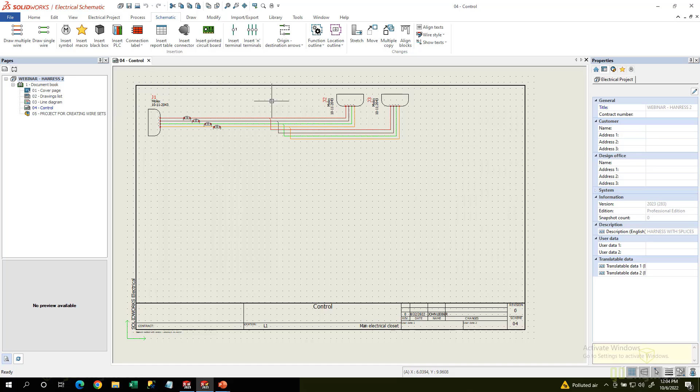Connectors have wires going to them, and then I've got some splices in here. So I have splice 1, 2, 3, and 4, and they're going out again to the connector. Kind of what I'm doing is I'm just taking wire number 1, splitting it off, so I actually have 2 wires behind the splice.

So 1 wire is going to go down to 1 connector on pin 1 on the other one, and connector 1 on the other, like J2, just repeating that same scheme throughout. So of course, once you're done, you group them all, add them to a harness, and then we'll go right over to the 3D side.

The cool thing is, if I have SOLIDWORKS going and I have the add-in turned on, I can open up the assembly straight from here. And when I do that, it will open up the project. You can see I've got the project loaded. The control is actually open on the 2D side, but I can see the schematic if I want on the 3D side as well for my viewer.

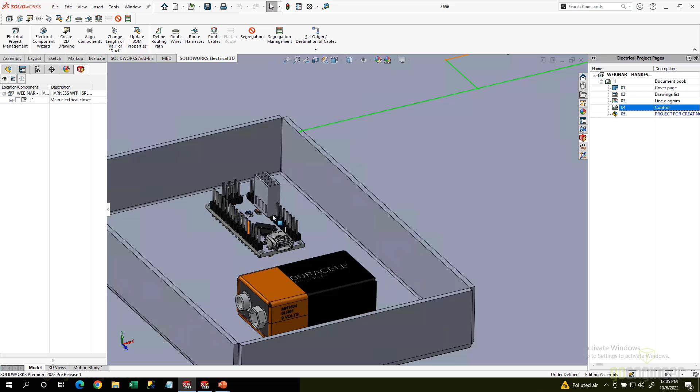And you can see I've got an assembly, I've got some parts, I've got my cool little Arduino Nano here with a little component on there for the connector, got a little 9-volt battery.

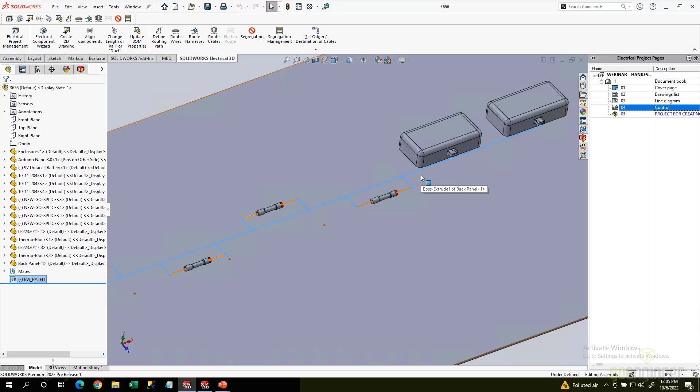And then if you've seen some of the previous webinars, I have an EW path, so it's a 3D sketch path that's going out here. Pretty much, this is where I want the harness — if you're doing wires or cables, it's where any of those things are going to route from and to. So that's kind of my little cheating road. You think about Google Maps, and Google Maps only routes you on the road, hopefully, and that's kind of what we're doing, kind of giving it the road that we want to go down.

So pretty simply, everything's from the 2D is kind of brought forth to the 3D, so all I have to do is say route harness, and I'm going to say use splines. I like splines. And then let's take a look at some things, because the whole purpose of this is that I'm going to do a whole bunch of things wrong.

I also want to reiterate, I'm running in SOLIDWORKS 2023, so I'm working on the pre-release of that, and it's been actually very stable. I've been quite pleased with this. All right, so let's take a look at this route harness.

Before I do this, sometimes when I'm doing troubleshooting, I'll hit the Draw Graph button. And what that does, if you think about Google Maps, it's got to find hundreds of different ways to go from A to B. So that's kind of what this is doing, it's finding all the different path routes that it can go from A to B.

But in this case, I have two settings over here. One is the distance between the routing paths, and one is between the beginning part and the next routing path, so the initial start point and the next one.

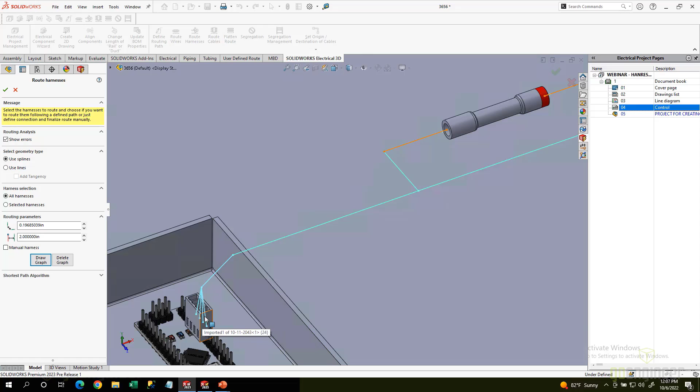So if I make this a 2 and say draw graph, notice that now it actually connected these two up. So now I have a roadway, it can find the connection paths between this from connection to where it needs to go. Then we can come down here and notice that it did this one, but it did not do this one. So I know I need to go a little bit further.

So I have two options. I could go back to the EW path and make it a little bit closer to this. It really depends on how much control you actually want over the paths. So if I make this 2.5, and we draw the graph, now it's close enough to that, and it makes the connection, and we're good to go.

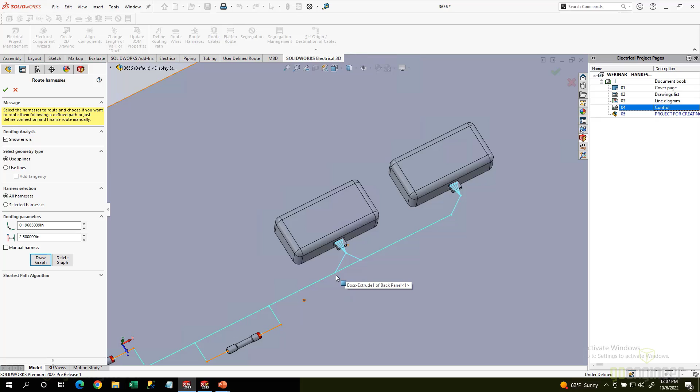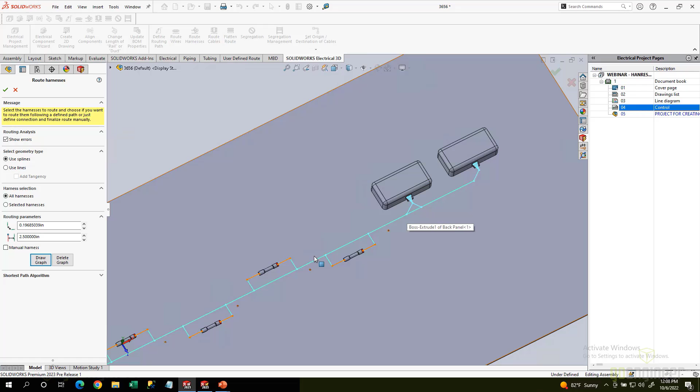Same thing, when we're doing the graph, it doesn't know whether the wires are going to go one direction or the other. So sometimes you'll see multiple locations, and depending on which algorithms you use, notice we have 3 different algorithms to choose from. When we hit the OK checkbox, sometimes it'll pick one path versus another. But for the most part, it's trying to pick the least possible path between the two connections you're trying to create. Then now I've got them, everything looks good, it has paths to go through.

I can delete the graph so I don't have to see it, and then I'm just going to hit OK. I'm going to keep the show errors on, just because that's what this webinar is about, is showing all the issues. So we'll give it a couple seconds, like 7 seconds, so that's pretty good. And let me go ahead and turn my sketches off.

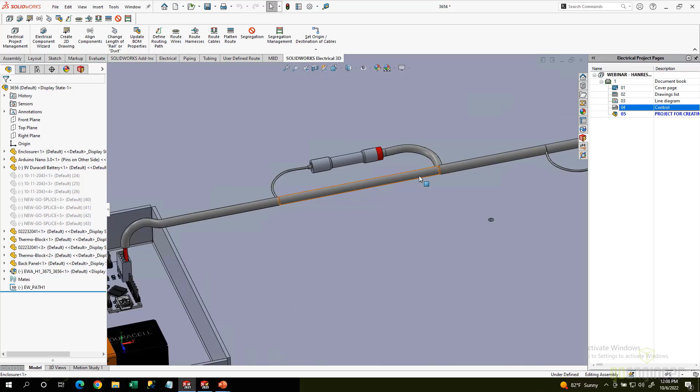There we go. So we can kind of see that I've got my 4 wires coming out of the connector, going into my, there's a CW cable point. So they all go to the cable point, and then the cable point goes up and around, starts going through the EW path. And it looks like everything's going pretty good.

I've got a skinny wire. It's spliced and is going to 2 wires. So I got skinny to fat. That's looking good. Again, skinny to fat, looking all right. Fat to skinny, that's not looking good. Even though I'd like to be more fat to skinny.

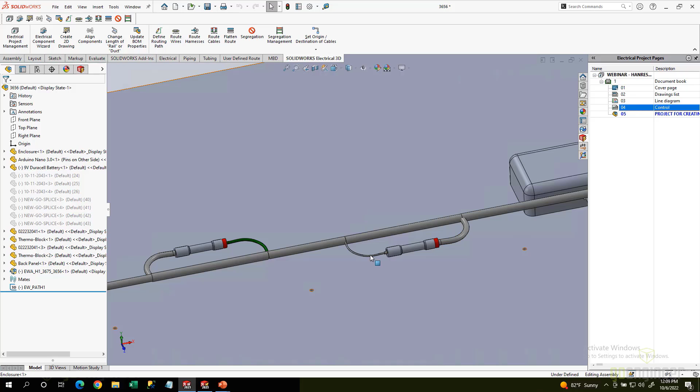But then here we got skinny to fat. So this is kind of what we're looking at, I've got 1 wire in here and 2 wires in there. And so the other connections all the way to the end connectors look pretty good. So I'm happy with that. And the splines look pretty nice between those two.

So a couple things we need to look at. One of the first things is, if I open up just this splice, some things I want to point out. One is it's got 2 C points, 2 connection points, so the direction it's going and how far out it's going to go. And then we also have a route point, and notice the route point is at the very center of the part.

And there's another little sneaky thing, you also need, if you run this through the routing library manager or the electrical component manager, it will add this component type equals a splice. So that's something you may need to make sure you have set up. Also type cat part may actually be added as well. So some of these are little things that you need in the catalog and in the part to make sure it works the right time.

The other thing that I did is I put a little red marker on here. So even though you may buy it and it doesn't have the red marker, I like to put some kind of a marking on there so I know which direction is my 1. So I'm going to say this is going to be 1 coming in and 2 going out.

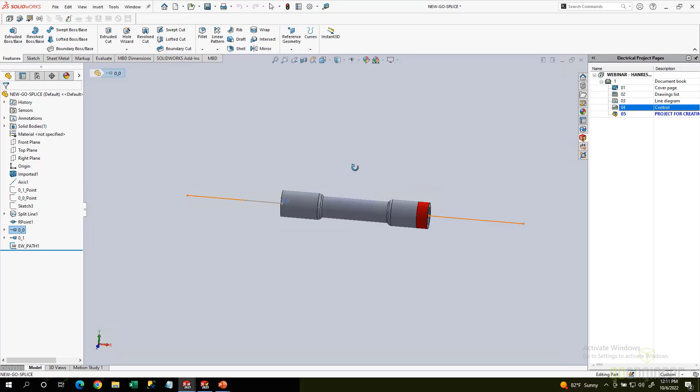And so that way I know the direction of the orientation of these things. Okay, all right, so we'll close out of this.

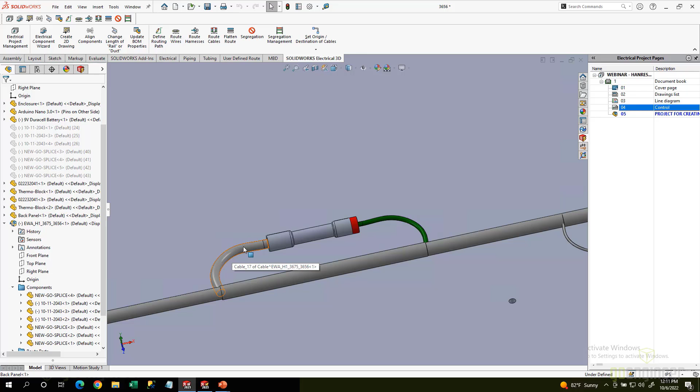And you can kind of see this one actually did right. I got one green wire, and then there's two wires in here, so the color is going to be neutral. It's not going to show green and orange, or two greens, because the wires may be a little bit off there.

So one thing we need to do is take a look at what's on the 2D to make sure this thing works right on the 3D. That's kind of the whole thing, is make sure your 2D's right. All right, so notice that on the splices, I got splice 1, 2, 3, and 4.

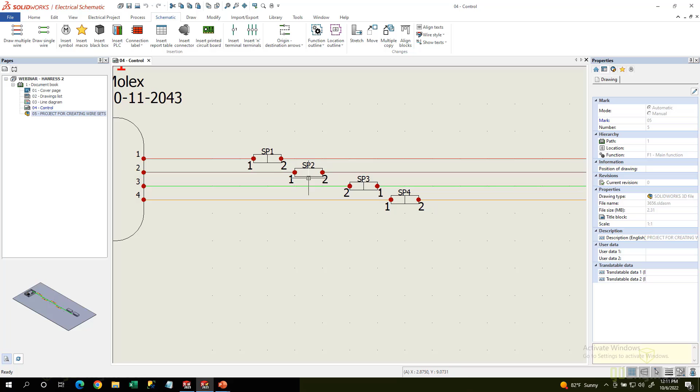Now, I got this from somebody else, and sometimes you may actually get other things from other people. So you got to be careful as far as how they manipulated this and how the symbols are created. Now, I can do something sneaky, and that's kind of what I did, is I went ahead and reoriented these two. And I can right-click and do this orientation and do invert.

But there's going to be an issue with doing this, okay? And I did it with all 4 of them. I'm doing this on purpose because sometimes you guys may run into this. And if you do, you'll now know why, okay?

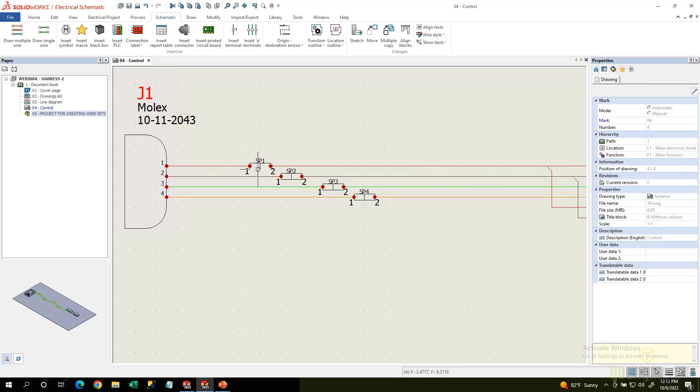So it looks good in 2D. It seems like, oh yeah, I've got 1 over here and 2 over here. But the invert is really just supposed to be used for terminals, not really for splices. So if I wanted to do it correctly, I should actually have a separate splice that has 1 and 2 on the proper ways. So main thing, try not to use this invert button when you're doing splices.

Okay, so let's see what it does. Let's just delete that. It's all gone. That's okay. We're going to route harnesses. We're going to route it. Wait 7 seconds.

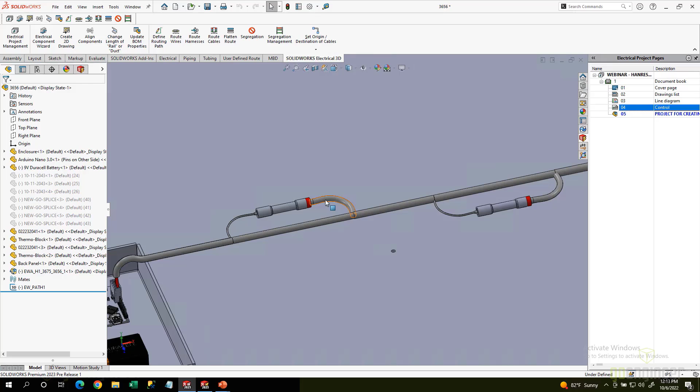There we go. And notice I've got, skinny to fat, or small to large, whatever you want to call it. And notice that on my 3rd one now, it's looking good. I got small to large, and then small to large. So everything looks like it's doing pretty good. Looks like it's happy. Everything's fine.

But there's a couple things. I know that I've got an issue here because it's gray. So something weird is going on. And also, if I zoom in there, notice that I've got this little, I'm not sure what that is, but it's there, and that's not supposed to be there. So something weird is kind of going on in here. And so sometimes we got to dig down a little bit and figure out what more is going on.

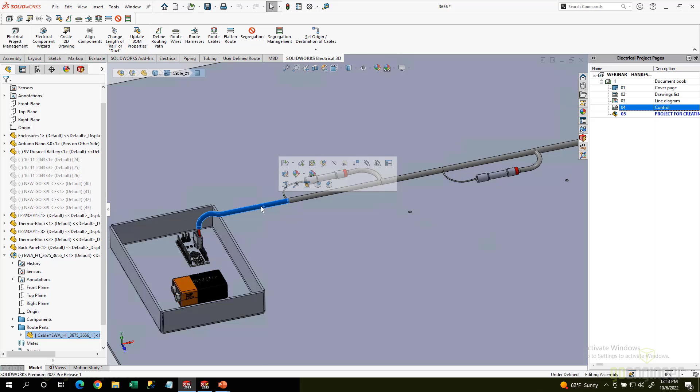So SOLIDWORKS gives us the tools to do that. So I'm going to edit the route. Just right-click any part of that, edit route. And there's a couple things we can do. I know that there's 4 wires going through here.

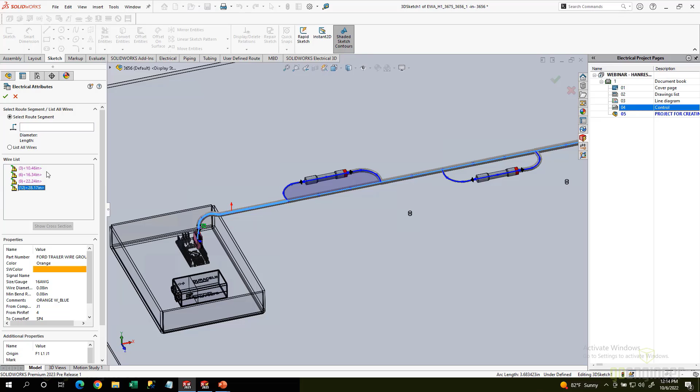We can check this by right-click and just go to Electrical Attributes. Then now it lists the 4 different wires that are in here. And notice that I got little exclamation points on here. So the exclamation points mean something's wrong. It may be kind of okay, but we need to probably double check it.

Okay, and if we go way down here at the end, before it goes off to these 2, these guys have a bunch of wires in there. So if I right-click Electrical Attributes, notice that I've got all the wires in here. And look, all these guys are good.

And I can click on them and I can see where their locations are going from and where they're going to. So this guy is going from this guy all the way up to the front. Wire number 2 here is going from this guy all the way to the front. So those 2 are looking good. In fact, all these other ones are really looking good.

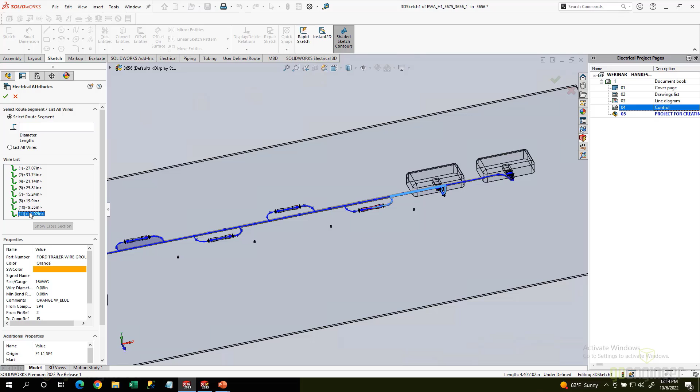Okay, another way to view these are to just do the Edit Wires button. So if you go to the Electrical tab, say Edit Wires, then you'll see this is going to be a list of all of the wires, okay, including some of my bad ones here. So notice I can, again, select on them and I can see where they're going from, where they're going to.

And go all the way down here. And then when we get down to the very end, where this connection is, you can kind of see what's going to go on. Let me zoom in just a little bit better. There we go.

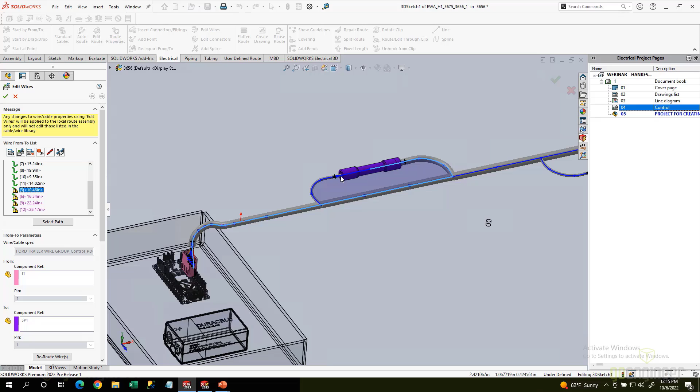This thing is actually going around to the wrong end of the C point, the connection point on there. Okay, I got the orientation of the 3D model correct, but C point number 2 is actually looping back around, and that's probably why I'm getting that little edge there. And if I click on this one, he's kind of doing the same thing, going around to the back side. This guy's going around the back side, and the other one's going around the back side too. Again, this could be fixed if I fixed it in the 2D and used the right orientation.

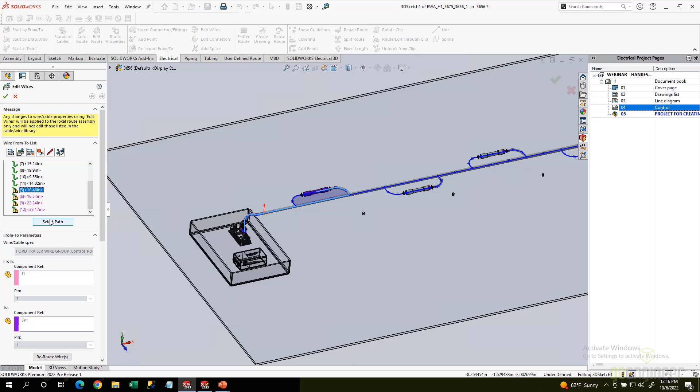Main thing is don't use the orient to flip it. Now, if I decide I'm just going to leave the 2D alone and not mess with it, I can fix it in the 3D instead. So I select it, hit select path, and you'll see each of these individual line segments are the different segments this thing needs to go through. For the most part, I don't need the last two, so I could delete them straight out here. Just hit delete, get rid of them. And I need to make sure it goes through this line, through that C point. I say OK, and notice that the error message kind of goes away there.

So again, I can do this pretty quick. I can also, instead of selecting them out there if I don't know which ones they are, unpick and then pick - I'm really unpicking just by selecting it again. Same kind of thing, just pick it and it goes away. So if I pick it once, it adds it; if I pick it again, it goes away. So that looks good, and we'll do one more.

So now all my wires look fairly decent. Okay, and we can dig a little bit deeper. If you scroll down here to the bottom, there's more options for the properties of the wires and some additional properties, and at the very bottom there's a More Properties button.

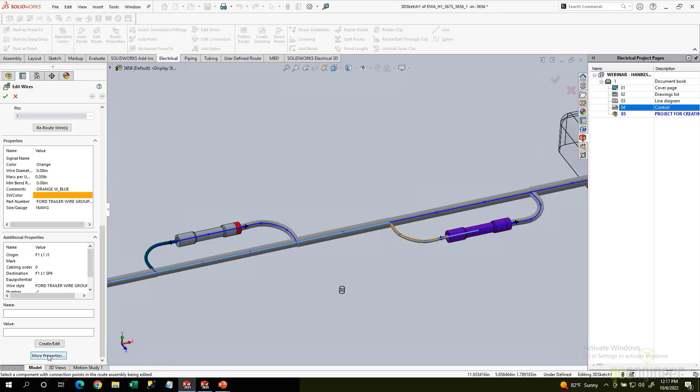This is actually what we pull in from 2D - this is your From To list. It gives me all your different wires, the lengths of the wire, the gauge of the wires. So there's occasions where you may have to come in here and look and make sure the OD of the wires, the gauge, and the bend radiuses are all coming in correctly, on the 3D side. So if it's not in 2D, then we don't have access to it on the 3D, so you've got to make sure it's good on the 2D side. This can be used as just a little check.

You can kind of see your little from and to. You could override if one of the pins is in the wrong spot - I can hit the little drop down, notice I've got 2 pins on that guy, this is on the splice. And I can also change the component if I need to. I don't want to do that though. Maybe on the connectors, you can kind of see I've got connectors and I've got my 4 pins on the connectors, so I do have options to change these. Please don't, because really all this information should be coming from the 2D.

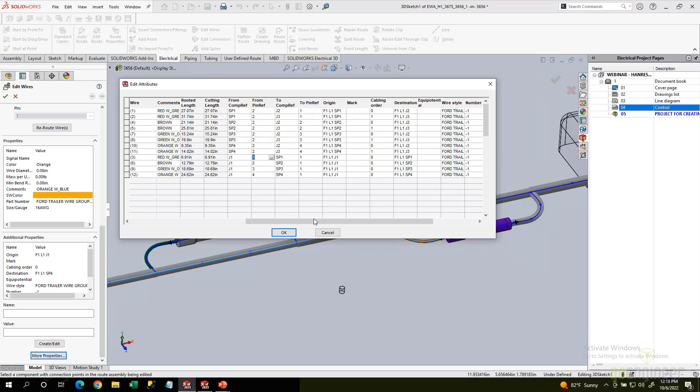You should adjust the 2D, and then once you import the harness, route the harness, this will update from the 2D side. But there have been some slight occasions where I've gone in and just needed to make an adjustment on one, and you can kind of get to this chart if you need to. For the most part, I just use it for troubleshooting, so it works out pretty good.

One thing you may want to do - occasionally some of these are like a twisted pair, coming out of here as actually 2 different wires. And it looks like I messed this one up, let me reselect that path. I think I hit undo on there. Let me hit OK out here just to make sure that it's good.

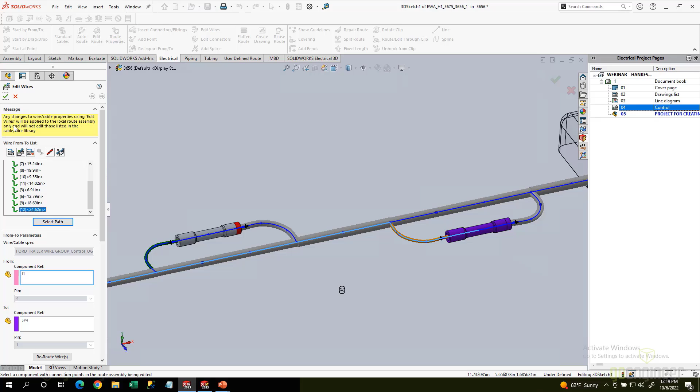All right, yeah, and see I get orange, I get green here, red, and then dark red, light red. But one other thing I wanted to show is that we do have twisted pairs. So if I select on 2 entities here, I can do a twisted pair, and then when I do the twisted pair, it'll tell me how many twists per, say for instance, inch, and it will automatically add that to the length of the wire. I'm not going to do it on this one, but I just want to show you that it is there and available.

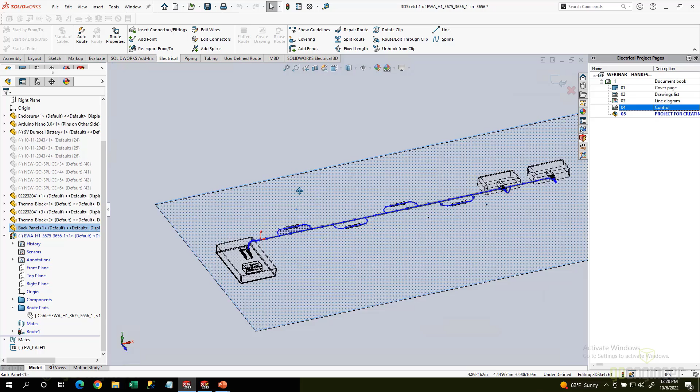And that's your edit wires. So that looks pretty good, I'm pretty happy with that. Everything's looking all right, got all my small wires to my big wires, so those are all nice and fixed. And then let's take a look at some others, let me get to the top level.

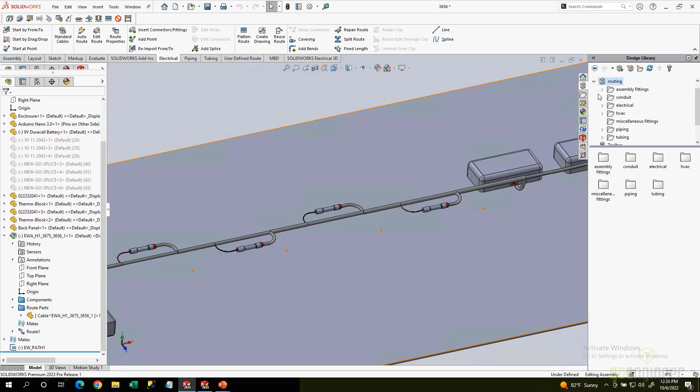In my electrical library, routing electrical, I have some little clips. I'm going to drag and drop a clip in, and I've got mate references, so it attaches to these little holes. Before I drop it, while still holding down my left mouse button, I can hold down Shift and use the arrow key, and you can see I can rotate it. I think it's like 15-degree segments or something like that.

So I'm going to drop it in there like that. It has multiple configurations, so I think my wire is about that size, so we'll say OK to that. This clip is at the top level of my assembly, so I just kind of want you to keep an eye on this and how it works.

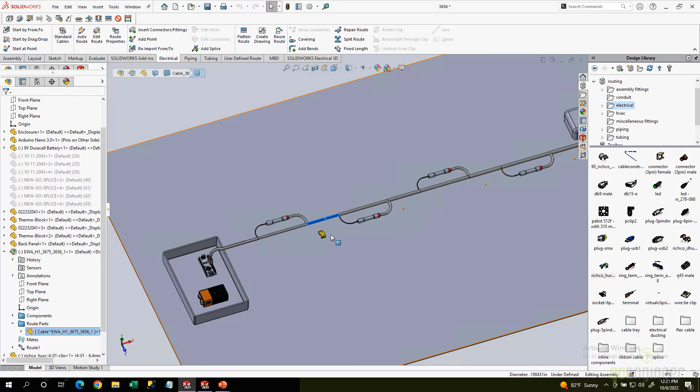All right, so then I think, okay, well, I want to route this thing, and it's way up off the ground there, so I want to route it through the clip. Pretty easy, just right click, edit the route. We've got a button that says route through clip.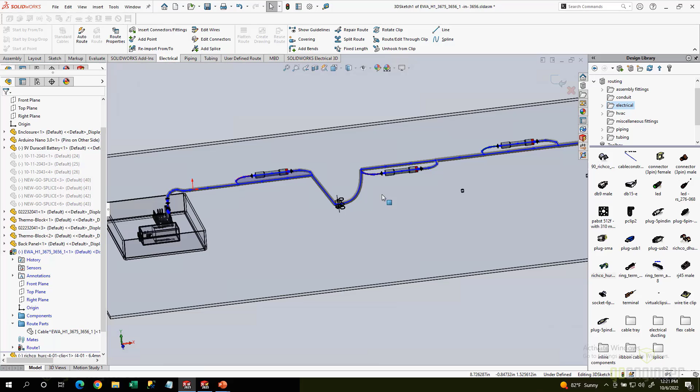So I pick on the clip axis there, and then I want to route this segment, and we'll say okay. And then I start looking at that, and I'm like, oh, that's not going to be good at all. You know, kind of expected the whole thing to go down, but the software is only going to do what you tell it to do.

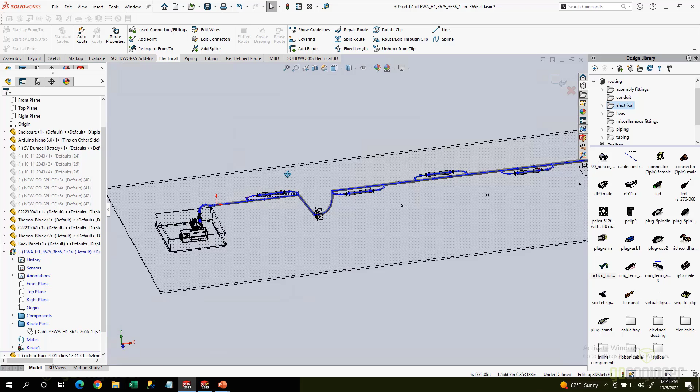So it said, oh, well, all this other stuff probably has constraints and things like that, so I'm doing that, I'm routing it through the clip. This is not maybe the best way to do it. We probably need to kind of look at our EW path first, and then go around and fix it. So I'm going to go ahead and close out of that.

Another thing that we can do in our editing of the sketch, the route, and I'll show this a little bit more later too, is that each individual segment we can show this sketcher triad, and then I can manually drag it around as needed. Each individual point can be adjusted, and you can also delete and add segments.

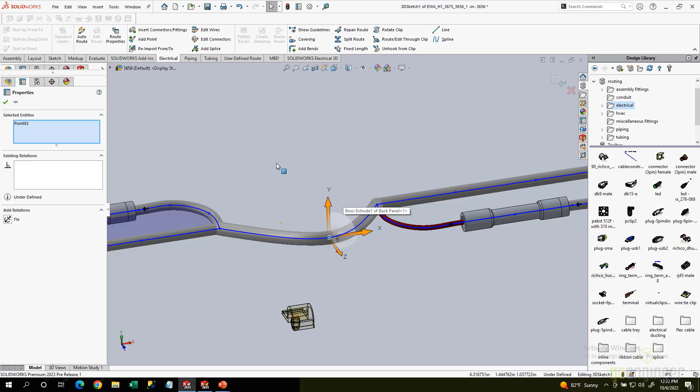But again, be careful, because if I do delete a line and then add a line, then I gotta go back and check my wires and make sure they're routing through the right direction. Okay, all right, so I'm going to close out of that, and I'm going to fix this.

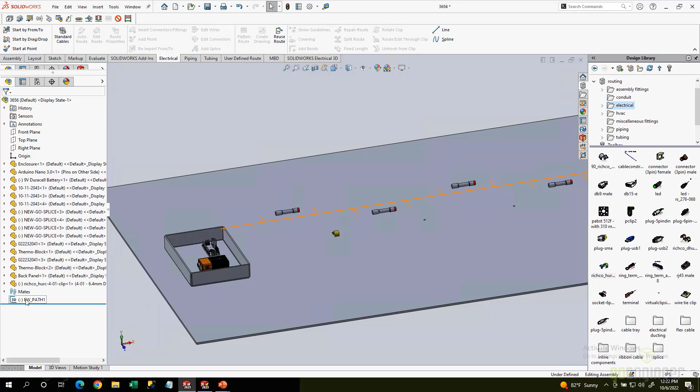So maybe I want all these wires to go down, so I'm going to really just go delete this, and I'm going to mess with my EW path. My EW path actually has some references to the heights of how I place these splices.

So first off, let me go edit one of these mates. There we go, we're going to edit this guy, and we're going to put him really close to the bottom of this thing. So let's make it, see if 125 looks good.

So if I zoom in there, that splice looks like it's about the same height as the center of that, so that looks pretty good. I'm happy with that.

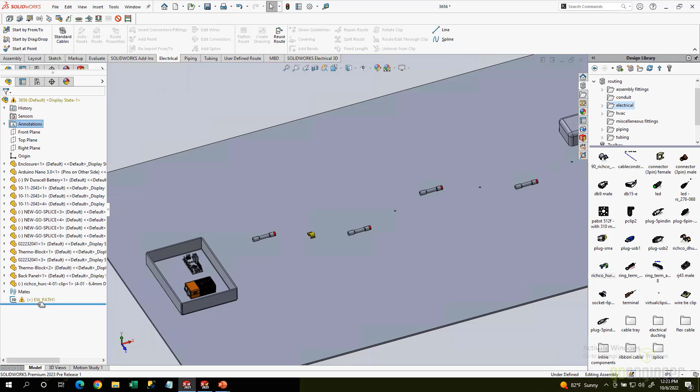And I've got all the splices set up to where they all are at the same height, so I just change one, it modifies and updates all the other ones. Once I do that, I need to check and make sure. You can see I've got an error on my EW path, so let's edit that.

And I've probably got, you can kind of see the ends of these are all stuck to the EW paths on the splices, so I'm going to get rid of this coincident relationship. There we go, and then let's just draw a line.

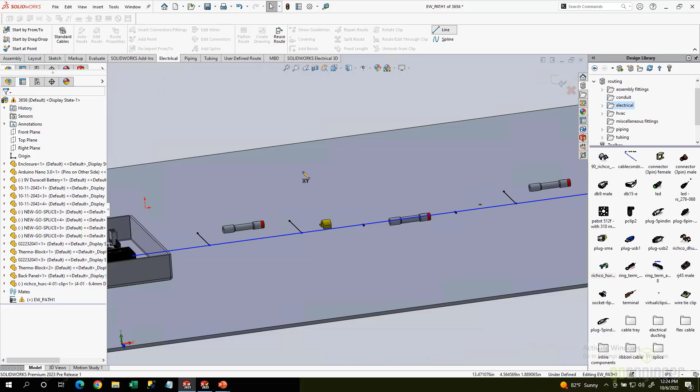Maybe I want to go from there straight down, and then maybe over a little bit. In fact, I'm going to make this one kind of a little bit sideways.

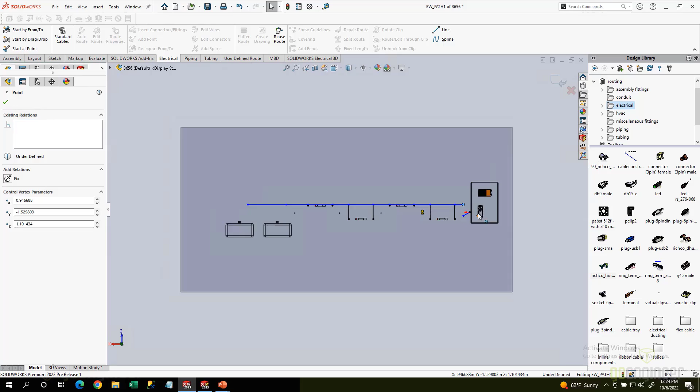Like that, and let me look at the top view. I want to kind of line this up with the origin, just kind of make sure that it's going close through that right there.

That should look pretty good, and I could give it dimensions and stuff if I want to, but let's see what it does. So finish out of the sketch.

This is the EW path. It's nice and healthy again, so I don't get any error messages on that. And then let's try and edit the route.

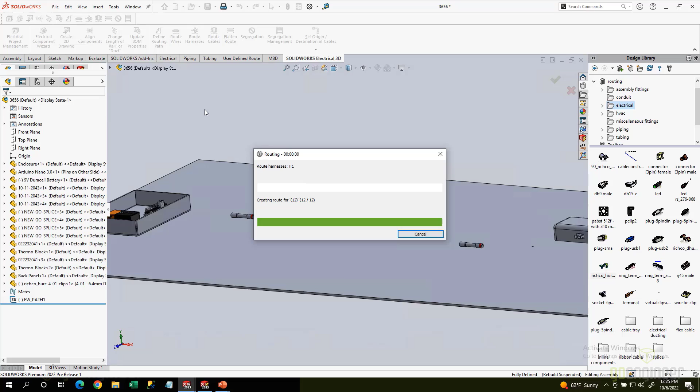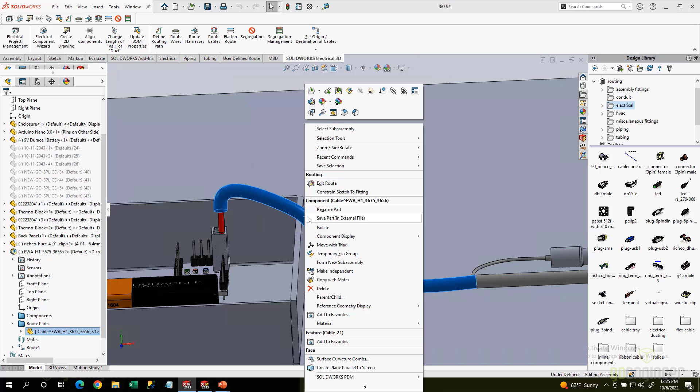All right, so it's looking pretty good. I was actually hoping to get an error in here, but it looks like it's fixed pretty good. I'm going to go ahead and try and do something real quick. I'm going to make this really small.

There we go. And there's occasions where you may get this colorful, kind of like a Beetlejuice snake looking thing. Really what this is telling you is that your bend radius is too small. So if you start crimping the wire or something like that, this is going to be bad for the wire.

So in this case, I have a tangent, a spline handle, so I can adjust that curvature and kind of smooth it out if I need to. Same thing, I've got other curvature handles, so if I need to use the sketcher triad, move this up a little bit.

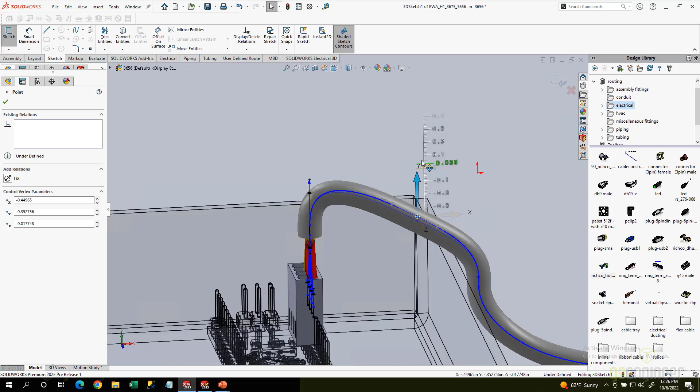And we can hide it. And then you can also drag these in and move them around as well. So you want to make sure that you have nice smooth contours, so that everything is working.

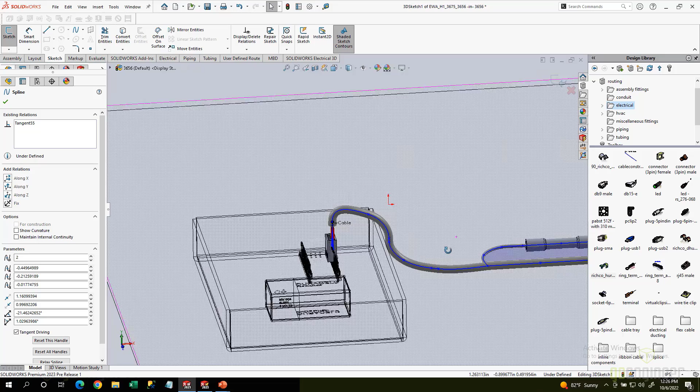All right, and then once I have this, it's really close, so I can go in and use my edit route through clips. If I pick my clip and then my route, you'll see it jog over just a little bit, and that looks way better than anything else.

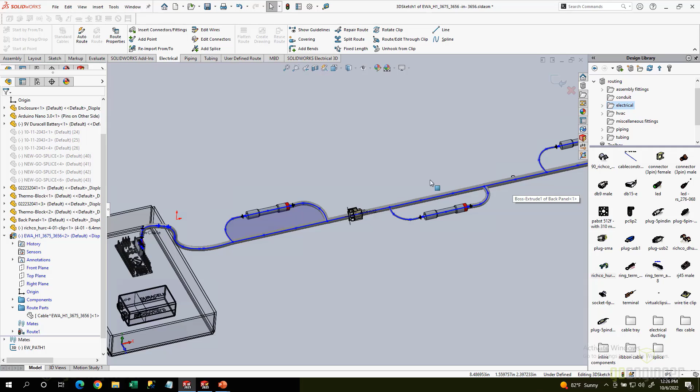Okay, now I'm editing the 3D sketch, so maybe I want to drag a clip in. Again, I'll use the shift and the arrows to flip it around. And let's go ahead and put in 2 more.

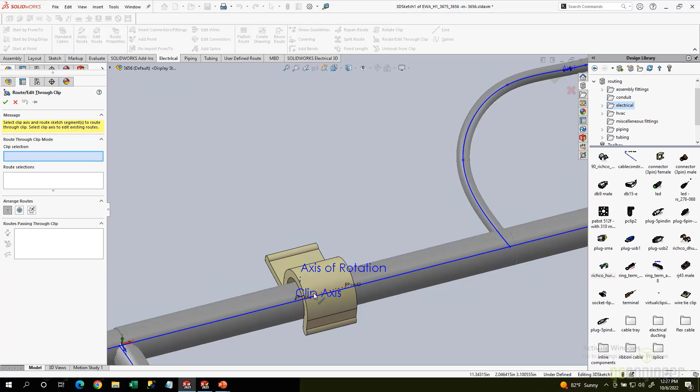All right, so looking pretty good. And then I do need to make sure that I route through the clips. Okay, so route. See it jog just a little bit.

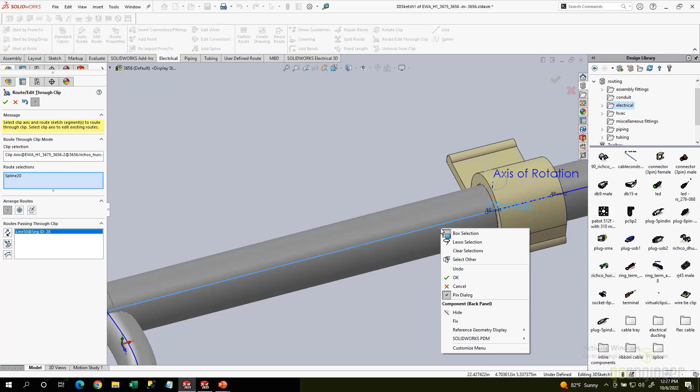I'm going to thumbtack this because I'm going to use it a couple of times. And I probably use some right-click OK. You don't have to move my mouse all the way over. All right, so now those are actually routed through the clips.

Now, even though they look like it, I do need to make sure I use route through clips, because when I do a flatten, I want to make sure that the clips go ahead and flatten with it.

If I do need to move some of these, I can. I can kind of jog them around, make it look a little bit more realistic, as the wire bundle's coming out from 8 wires in here to 4 in this direction, 4 in this direction.

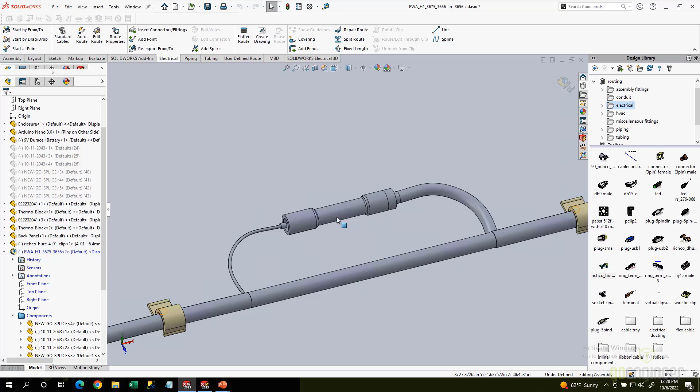Okay, so that's all looking pretty good. Finish out of the sketch. Again, I rerouted, so I do have my little error. I should need to go fix that on the 2D side, and then that will automatically update and fix on the 3D side. But we're going to keep on going with this.

All right, with that, I'm going to finish out of the routing. So hopefully that gave you a couple good little techniques to troubleshoot some of the routes and the wires and all that. Next I'm going to go right into doing a flattened route.

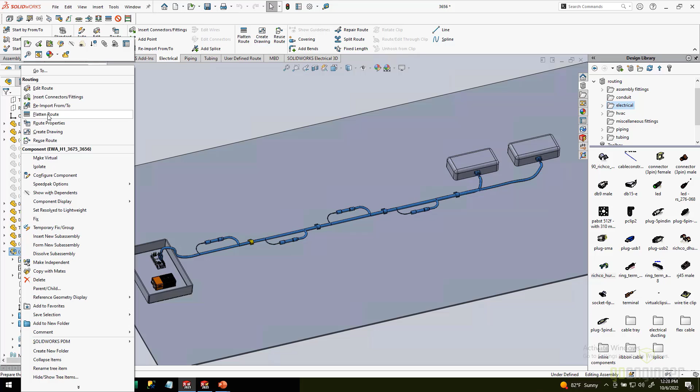I'm just going to select on it, right-click flatten route. And I do have some extra little loops on there. Those were the backward ends. I'm going to go ahead and accept them.

And we have 2 different options. We have annotation and manufacture. I've got a slide a little bit later where I'll talk about these. Annotation is really just going to show you individual line segments.

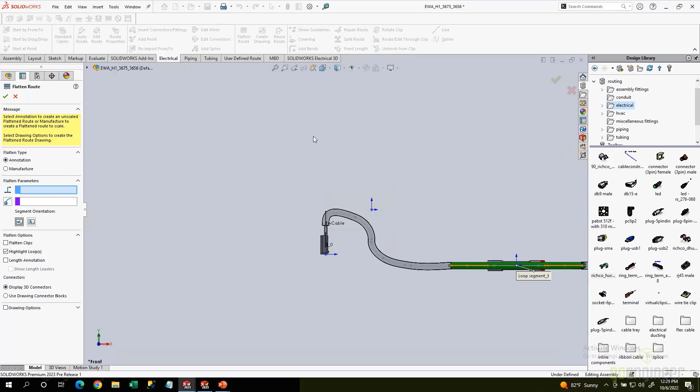In fact, I'll go ahead and do one real quick, just so you can see it. And I'm not going to worry about the clips or anything like that, but I do want the connectors. There we go. And kind of what it's going to do, it's not super realistic. You can kind of see everything is nice and straight leg.

And if I would have checked the button for the annotations, then I would have got the lengths of each of the individual wires and stuff. Okay, but the issue is that if you're going to do nail board views or anything like that, then we need to go to a manufacture route.

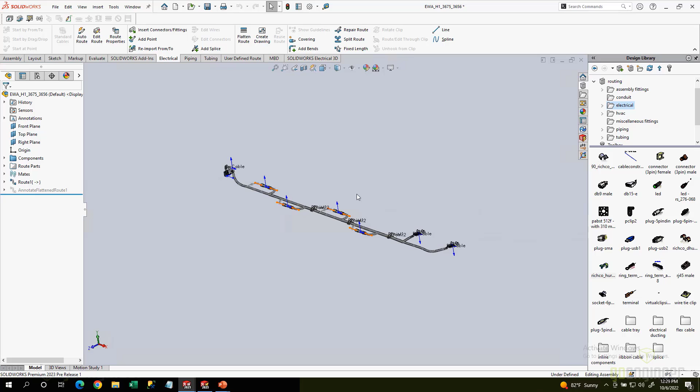So I'm going to go back to my regular route. It's got my different heights and everything on there. And I'm going to do a flatten route again. This one's going to be manufacture.

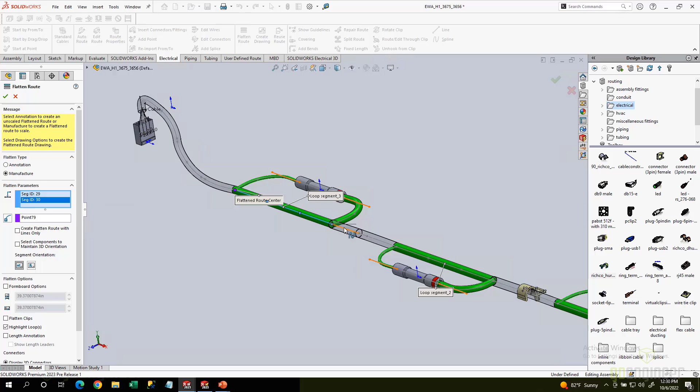And for the flatten parameters, I'm going to select all of these segments that I select are going to be horizontal. So especially if you're doing a very large harness, try and pick all the individual spline segments that you want to flatten out and be straight, because that will save you a lot of time when you're trying to do edit flatten route. So all of those segments right there, it's going to be a horizontal line or a couple horizontal lines.

And then I do want a formboard option, so when I print it out, it's going to be true to scale. So I'm going to say this is probably 72 by 48, something like that.

And then I do want it to flatten the clips. I do want it to show the lengths and the 3D connectors. All right, and I'll worry about the drawings in just a bit. So I'm going to go ahead and say OK. And there's a lot of math involved here, so it actually did this fairly quick. You'll see I get all the little tags for the dimensions.

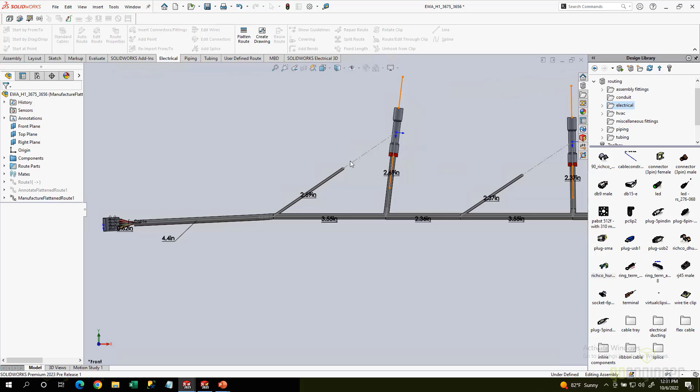That's looking pretty good. And then I've got my different splices, and I've got a little connection saying, hey, this wire goes to that end of the splice. So you can leave it like that if you want, or we can do a little bit of cleanup, which I'll show you in just a bit.

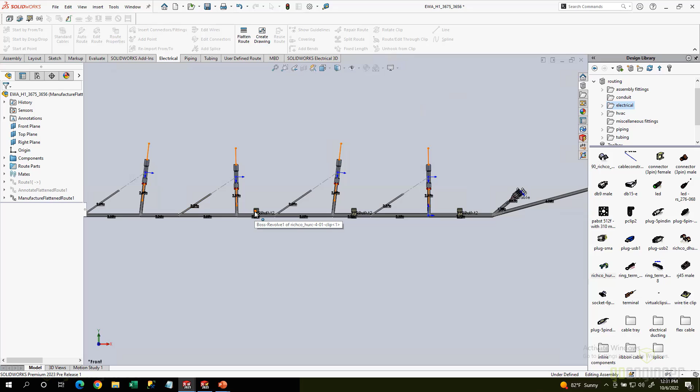So everything's looking good. Notice that the clips do come with it. These were the 3 that I actually put in with the route. So you do have to be kind of cautious as far as whether it's at the very top level of the assembly or whether it's in the actual route for them to flatten.

Okay. If I want to straighten this up so it fits on the sheet of paper a little better, we do have the option to edit the flattened route.

And so I'm going to select on different route segments. So a couple things we can do. If I select on a segment, I do have the option to try and make it horizontal or vertical. And click on that. And I'm going to say horizontal. And it's going to try and make that horizontal. I may need to flip it.

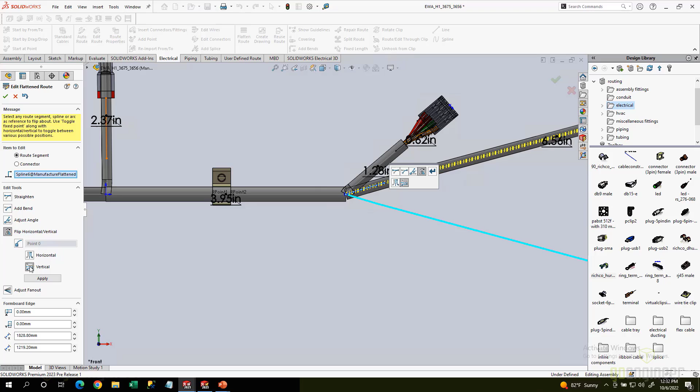Or if I want to do just adjust the angle, this one is a little bit easier. I'm going to adjust the angle and then use this horizontal here. There we go. And it only did it for that segment. And you have to do each individual segment at a time. So I'm going to say apply to that.

So if I also want to do it on this one, then I need to select it. Now this is horizontal. Okay. So now that's looking nice and straight.

If I did want to jog in it, I can select on it. I'm going to undo that. And then I can just grab this wheel and drag it. So if I do want it to be a certain angle out, or maybe I want it straight down.

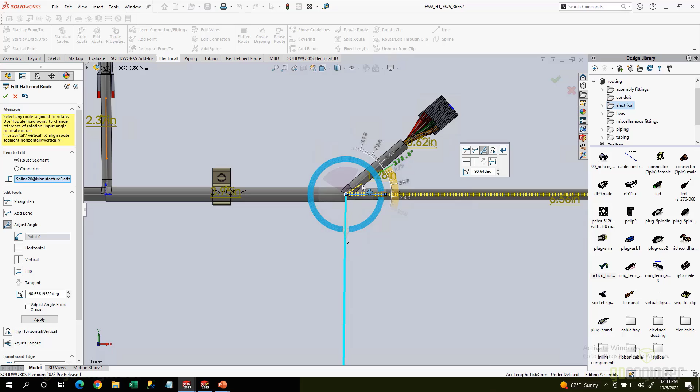And make sure you hit apply. Same thing, I'm going to maybe make this one kind of close to straight up.

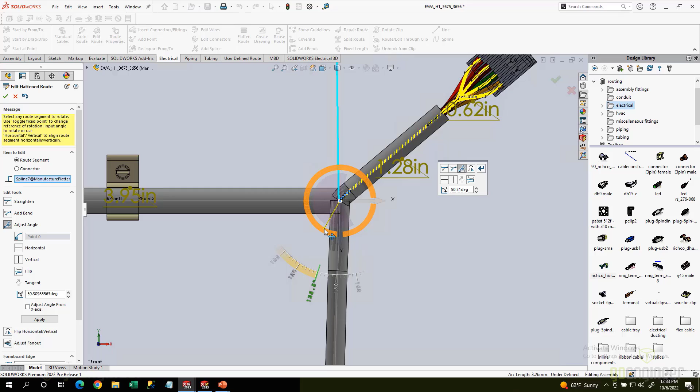That way when I do my nail board view, they've got something they can actually go around and then back up. And if I really wanted to look good, I'd spend some time, make this all vertical, make all this horizontal on these splines. So I'm going to do a couple kind of cool things with these.

So notice I can rotate these around as well. And then we'll move this segment around.

So I have seen some companies do something similar to this. So I got to kind of point it kind of close to that thing. And all you're trying to do is say, yeah, these are connected like that.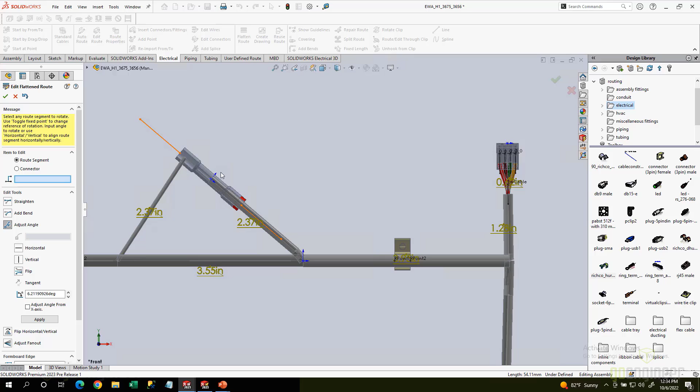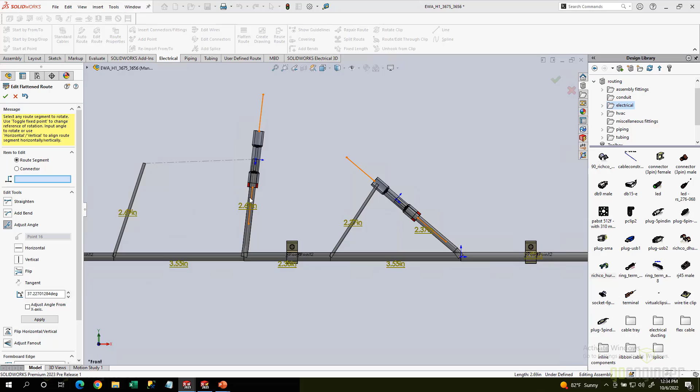And then if you want to get real crazy with it, so I'm going to go ahead and leave this one up a little bit, but I'm going to insert, so let me actually move it up just a little bit. Around in there. And same thing, I'm going to kind of move this one closer.

And like that. And then we can insert, there's a button for add bend. So when I pick on that, then when I drag it around, I'm actually adding a bend in that segment. Oops, let me drag that out of there just a bit. There we go.

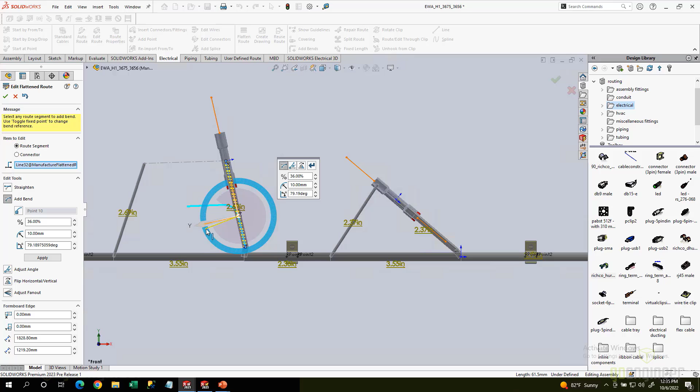All right, and same kind of thing, I can select on, I've got add bend on. So I'm going to pick on this guy. And I should have picked a little bit lower down there. But hopefully you get the point on that.

So now it looks a lot more realistic, as far as where the spline is. And of course I got my length segments on there, so I know exactly what the lengths are.

All right, so just for fun, I'll just do 2 more quick angles on these guys, just to kind of get them a little closer.

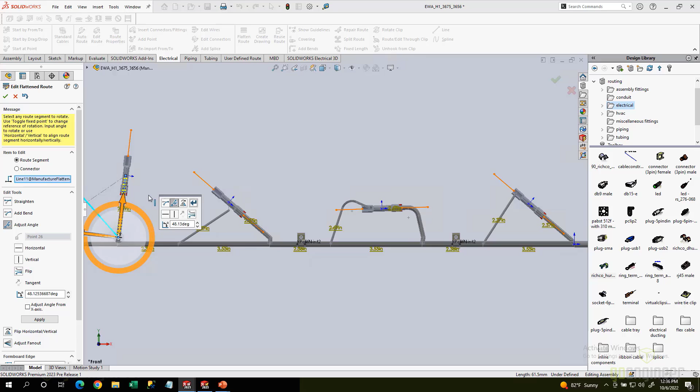More. You see it picked up the last angle from the last one, so that's helpful. A lot of times if you're doing 10 of the same thing.

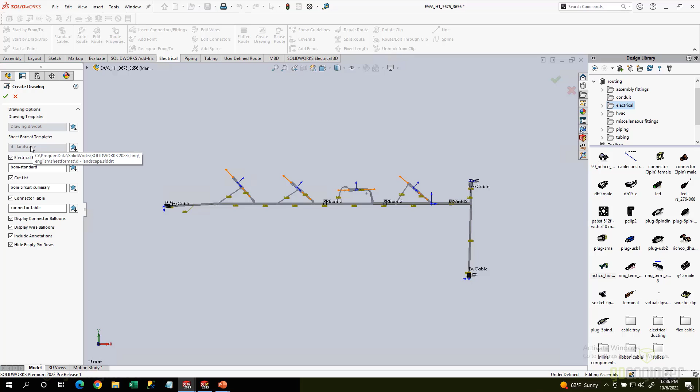So the main thing is that you're trying to get this nice so it fits on the sheet of paper. Once you do, hit the button for Create Drawing. I'm going to use a D-size landscape, check all the boxes, and hit OK. See where it goes—it says I didn't have a length field for my bill of materials, so I'm going to add that.

So that looks pretty good. Here's our bill of material, I'll zoom into that. A couple quick techniques for the tables themselves: I'm going to drag these out to where I have pretty much one line. If I drag the bottom, I can hold down Shift, and when I drop it, it'll make it the same height for all of these.

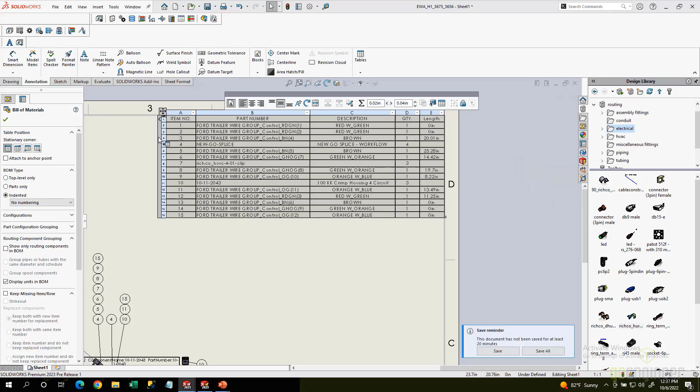That looks pretty good. You can see I've got a lot of different wires, and the nice thing on the bill of material is that I can drag these. Maybe I want my splices up at the top, so I can just grab that row and drag it. Now the splices are number 1.

Maybe I actually want my clips to be up at the top too, so there's 3 clips. We'll put the housing down here. Again, it's very simple to just drag and drop these around, and the rest are all the wires with the wire lengths.

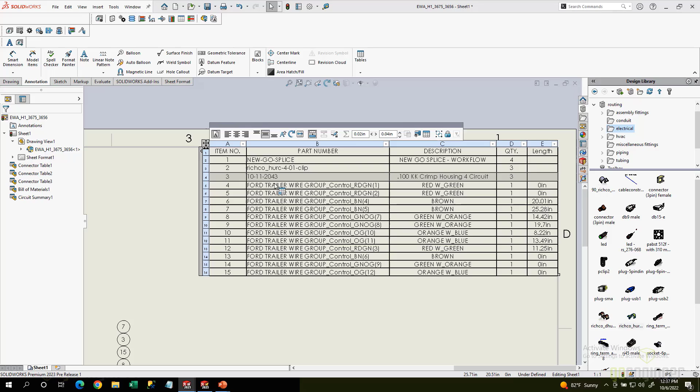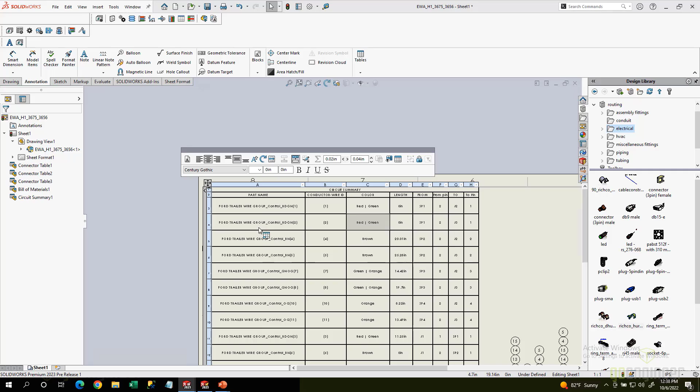Let's go over to the circuit summary. For the most part, it is your from-to list. Same kind of thing, I'll drag it out. Once you have the size of these, you can save this table out as a table template.

Then I could select this table template and it'll be good to go for next time. On this circuit summary, I've got my part names, my conductors, my colors, the wires, the lengths. So when it's going from this component to the other component, you can see that it's got two colors in there. Really good use there.

Same thing when I come close to one of these connectors—this is kind of like the circuit summary for the connectors themselves. I like to make those a little cleaner looking.

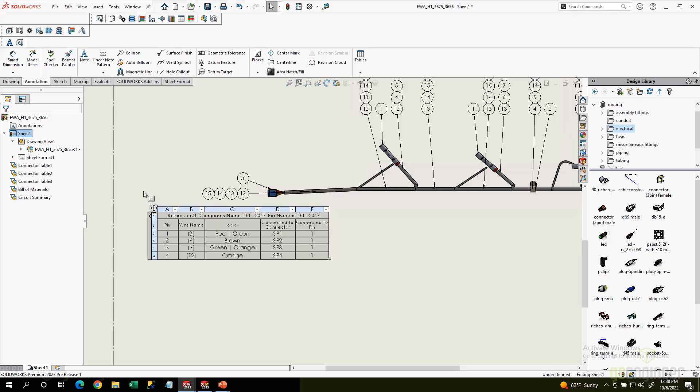Then we have individual balloons for each of the different items out here. Some of the balloons actually put them on a magnetic line, so if you don't want them on a magnetic line, you can drag them and pull them off. Pretty simple and easy to do.

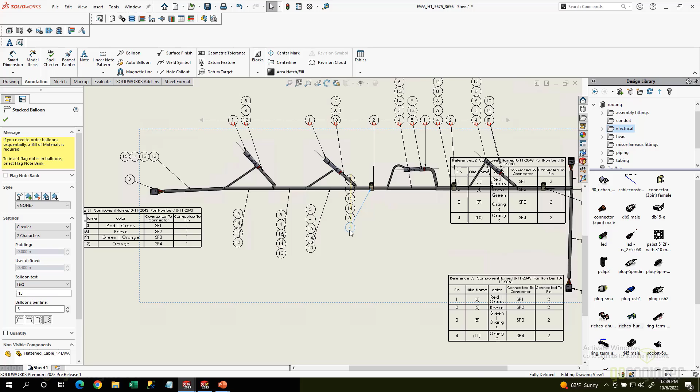Maybe I want a couple of these off of there. We'll move these circuits—this one's for this guy.

So even though a lot of it is automated—I mean the drawing took me 2 clicks—you still got to do a little bit of cleanup. But not bad at all.

That looks pretty good. What I really wanted to do is put some of these wires, or the balloons, on a magnetic line here. Before I do the magnetic line though, I want to switch these so they go down. So we have a lot of different options to make sure this thing looks nice and clean.

Really what you want is for the guy in the shop not to come ask you questions, so the more information we can give him, the better. And of course you want it to look professional.

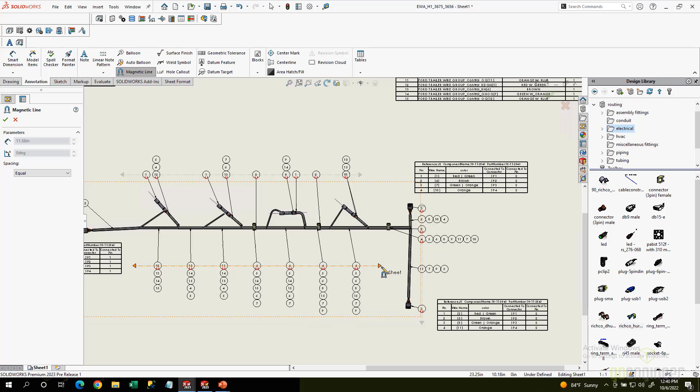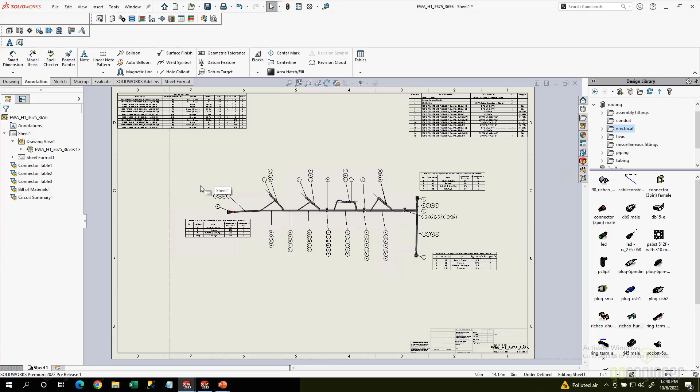I'll put a little magnetic line, grab all the balloons, bring them all up, and that looks pretty good. There's a couple different ways in which you can do this—there are more options available, and I wanted to save a couple of them.